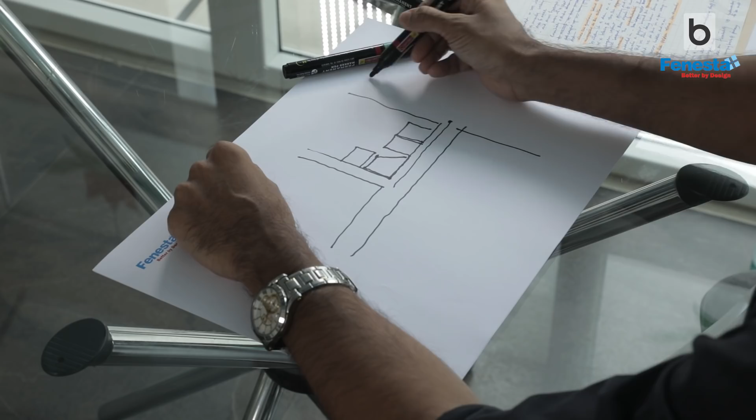So the plot is located in a typical residential neighborhood. It's an upmarket residential neighborhood, so high land values, and it's a corner site. If I just draw how this works, there's one road here, and another road here, and the plot sits like that, with neighbors on both sides. Further down the road is a really prominent road. So this is our site.

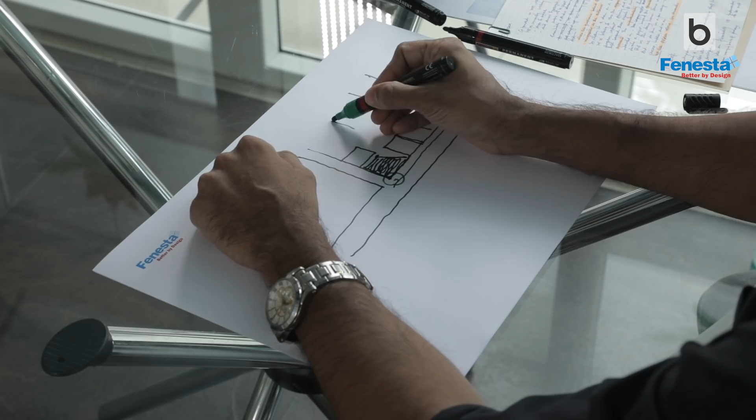It's essentially almost a square, but it's got a little taper on this side. And there's a little tree in the corner there, which adds a lot of value in the eventual outcome as far as the elevations are concerned. Now, the north is up here, so that's the east. And this will in some sense determine the way we imagine the entry experience and how we move and navigate into the building.

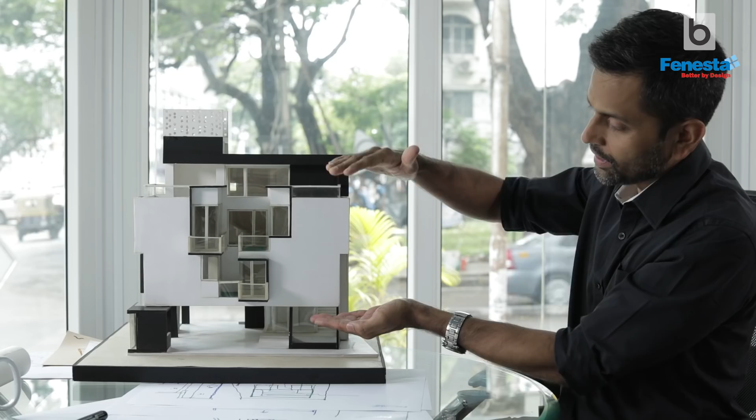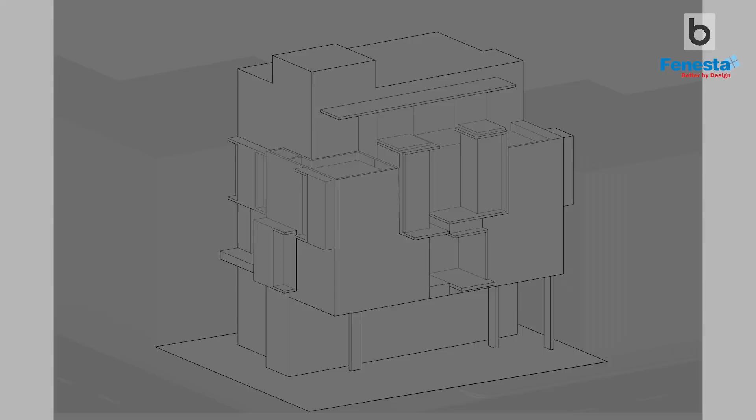Our endeavor was really to focus on this much of the building, to make it feel like it's a kind of hovering box of just 2 levels, and to make it feel like it's essentially all blank on this side with a large scoop out of varying degrees. On the top level, what we've done is lift the edges of the bedroom up by about 2 or 3 feet, and that's what allows for this really tall glazing here, which adds a lot of character to the facade, we believe.

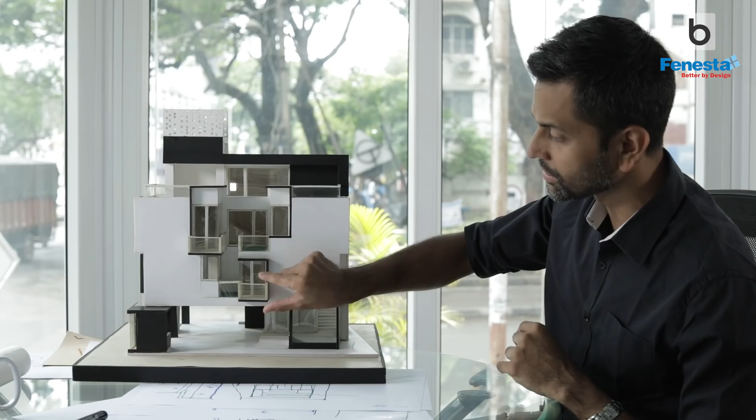So the scales of the materials are also constantly varying. On the front, we've used compact laminates, polished black plasters, MS and steel and glass. And all of that is also kind of constantly shrinking and expanding, as you'll see here. So it's of this size, and then sometimes it's of this size, and sometimes it's of a different size altogether.

So by puncturing it in, by pushing it in further, it's really tried to reduce the depth of the house only in the center, and that's how the light kind of pushes into the house all the way to the back.

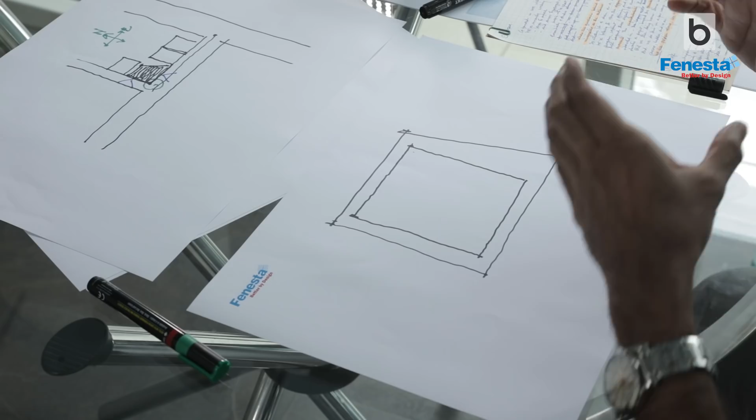Talking about the program itself, this is a squarish site with one taper here. So what we had to do immediately is regularize the plinth, and that in some sense was dictated by principles of Vastu, which was not bad because we ended up with eventually a nice clean box, and we also tried to make that hover above the ground. We kept the ground as free as possible and created very little program on the ground floor over here with an access that goes on the side.

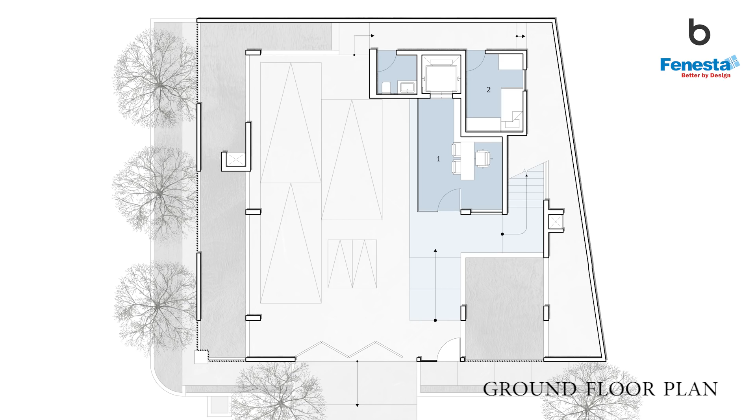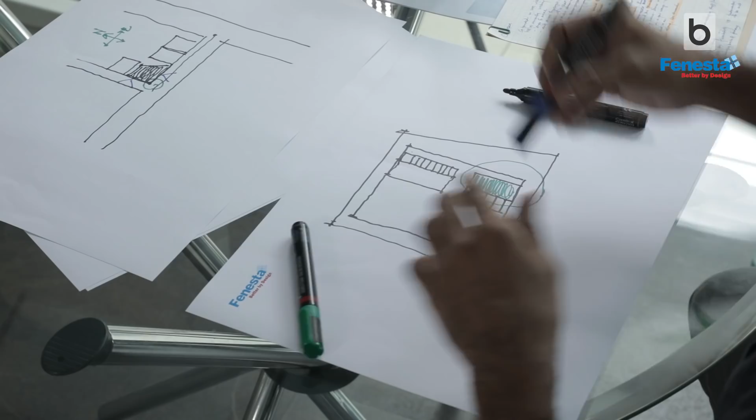And then we have an entry from here off the street, which is more gradual, and a little court here that highlights that entry experience. So in some sense, we have the tree on this side, and a bit of green here. And all of this is kept free for both parking, and it doubles up as that ground floor entertainment space.

We weave through the space like that, and that's an intentional delay to make the entry experience a little more gradual. It helps that we have to enter the house from the northeast.

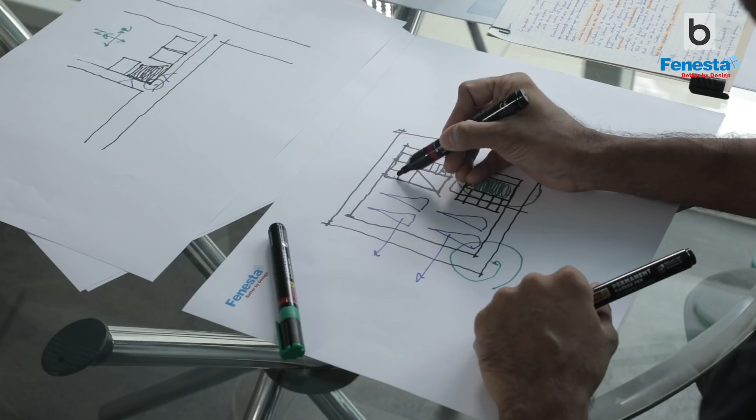On the ground floor, we have a little office space for him that sits here, and we have a little elevator here, so this doubles up as a lobby. He uses the office and goes through his private lobby to go up to the rest of the house, and some little quarters that sit below the mid landing on this side. So that's the back of house functions.

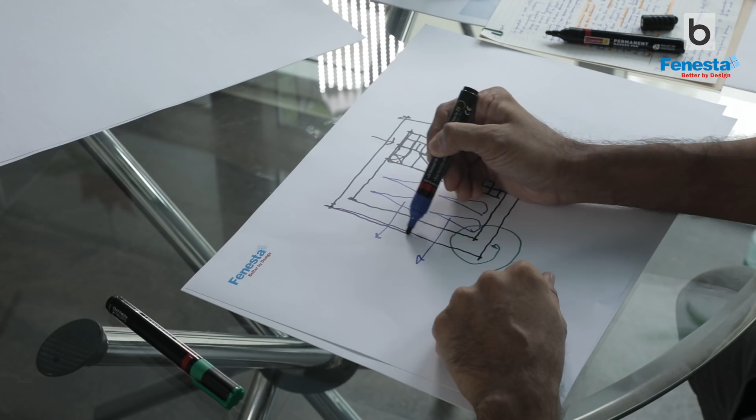What we've also done on the ground floor is highlight the edge, which is tall. So not only does it provide him the privacy and security he requires, but also when you look at the building on these two sides, it almost feels like it's sitting on a grey pedestal, because it's essentially a grill with a lot of perforation, allowing light and visibility in, but it feels like the building is sitting on top of it.

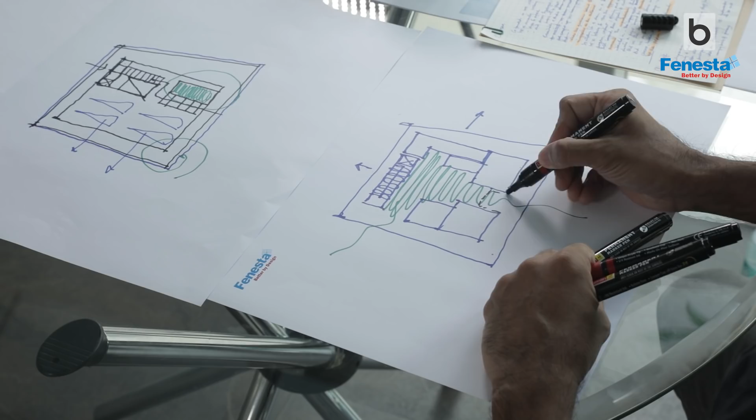So all of this goes up to the base of the first level. On the upper level, you start getting a sense of the diagram of the plan, which is really all of this space in the middle. Most of the living areas are fairly fluid, and this is an open kitchen here, so it kind of bleeds into this space. But the highlight of the house is really in this area, which literally reaches out onto the street, this road in front.

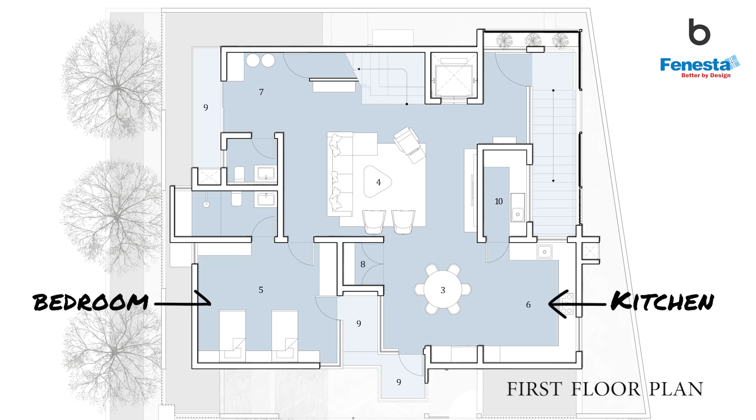As we explain the form, you'll realize it keeps varying in plan and section. The program compresses the space in the middle, and there's a lot of activity outside, mostly outdoors, in terms of balconies and step-out areas, decks and so on. So this is cook, this is sleep, this is wash, and that's the climb up, and this is a whole lot of utilities and circulation. The program on level 1 and level 2 essentially repeats.

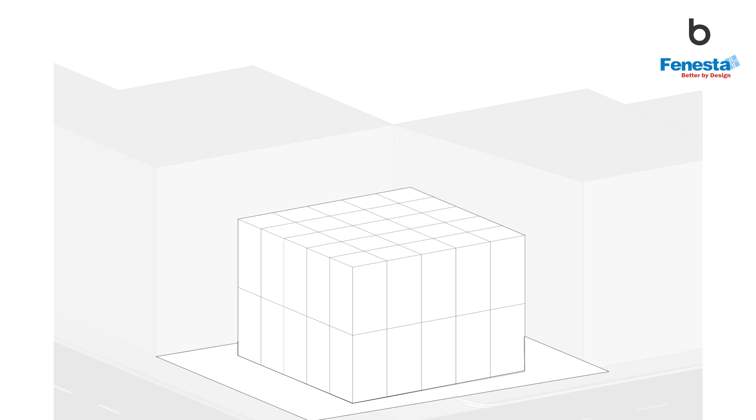What becomes interesting is we always imagine the building, because there's a lot of volume occupied by the functions within the house, shouldn't be perceived as very bulky on the outside, even though we required 3 floors to accommodate all the client's requirements. So on the next level, the house steps back and occupies only so much, and that's the top level, where the client gets 2 terraces.

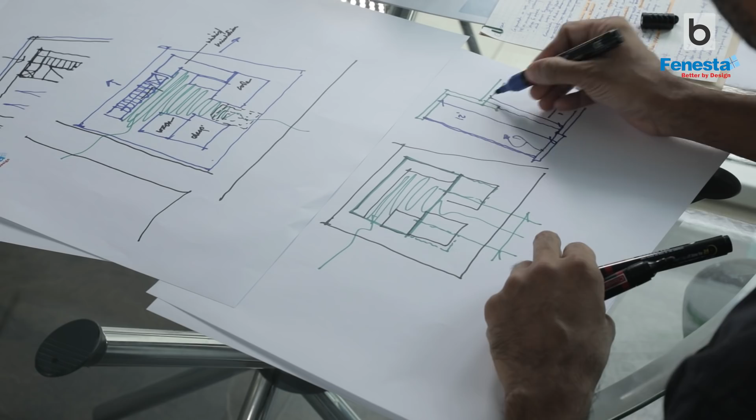So this much space within the bedrooms on this level is suddenly elevated, giving a kind of sectional quality within the bedroom. Inside the bedrooms, because we've elevated the front of the house but kept the program at the back on the upper level, we're looking at 12 feet here, and something like 10, or maybe 10.6, there. This bumps up and creates a different kind of space within the bedroom, changing the sectional quality of the building altogether.

And beyond that volume, we have these step-out spaces that we're able to move out of the building.

On the inside, we've opted for a fairly warm set of tones for the residence. This includes marble, two tones of marble, a white and beige combination, and this bleeds onto the walls in some spaces. We're very conscious that the house needed to feel right, it's a compact home, and the floor plate is compact even though the overall area is a lot. It was important that we chose materials that didn't feel very overbearing, so there's a mid-range tone for wood, some cement plaster finishes, whites and steel.

As we move up into the sleeping spaces, we've brought in more warmth, so the floor turns into wood there as well, and we've carried the same thing even into the washrooms. We haven't really differentiated the palette between the living areas, sleeping areas, and washing areas.

There's a lot of glass on the front, so a lot of the indoor quality is dictated by the kind of light that comes in from the front edge. Although we're grabbing most of it from the south side, by creating the necessary depths we were able to dictate the kind of light that fell into the various parts of the house, grading from really bright to mid-bright to an almost cozy, diffuse light quality towards the back of the house.